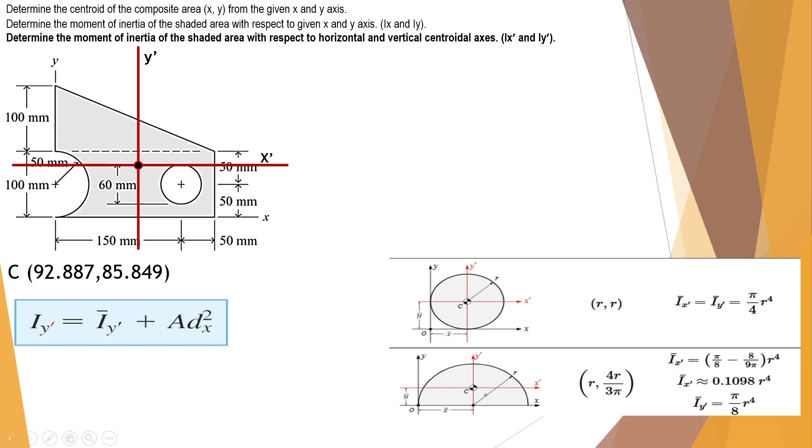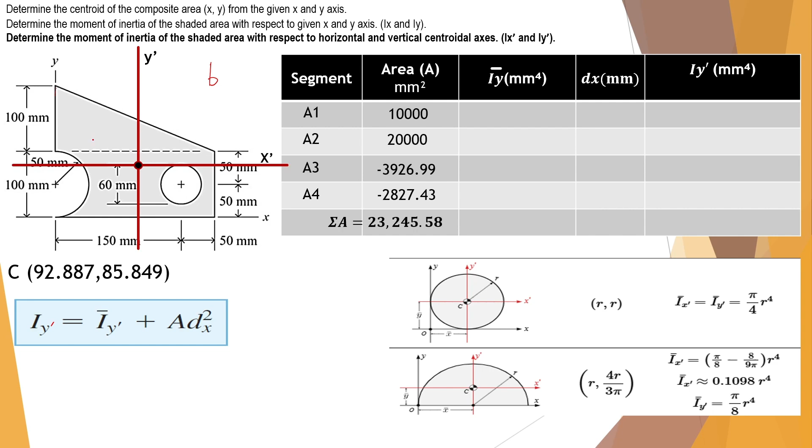So for the triangle, what will be the centroidal moment of inertia now? What is your base now? What is the height of the triangle? The base now is 100, since it's parallel to Y prime. And as I told you, the one perpendicular to the reference is the one that gets cubed. So this is your I, y, centroidal.

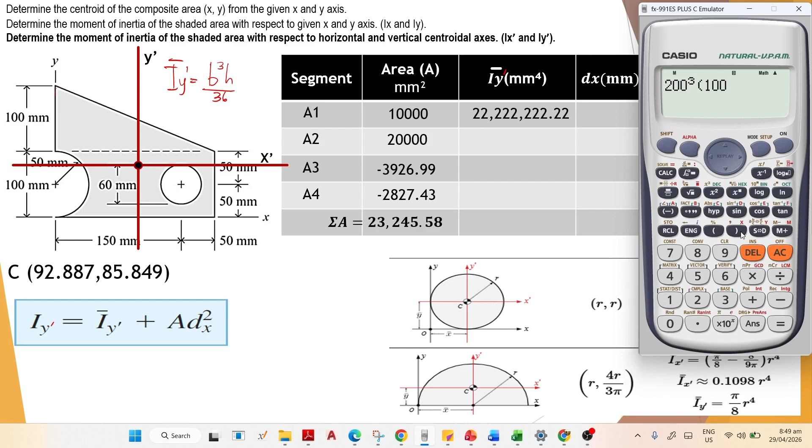Now for the semicircle orientation, let's set it up. The IY prime here becomes its IX prime, centroidal, because that's the one parallel to the axis of reference. So, 0.1098.

That's what happens in cases like this. 0.1098 times R of the semicircle to the fourth, which is 50, giving 686250. This is negative, to be deducted. And the circle is the same, pi r to the fourth over 4.

Now let's do the dx. This is measured from the reference Y prime, the centroidal axis, to the original centroid of each shape. So this is the original centroid of the triangle, and this is the dx we're talking about. To incorporate the centroid of 92.887, relate it to its original centroid measured from Y, which we got earlier — 1/3 of 200. That's what you're looking for, the 92.887, which is 1/3 of 200.

Relate them, it's deductible. 92.887 minus 200 over 3 gives us 26.22. And the centroid of area 2, the rectangle, is 100 from Y. Since 100 is bigger than 92.887, you just subtract.

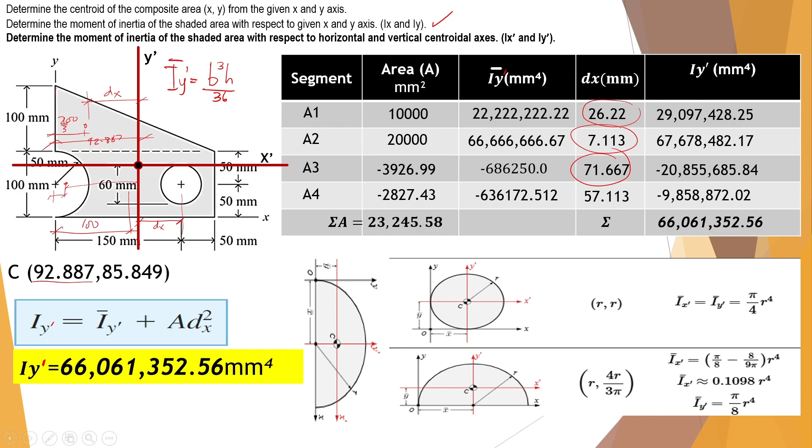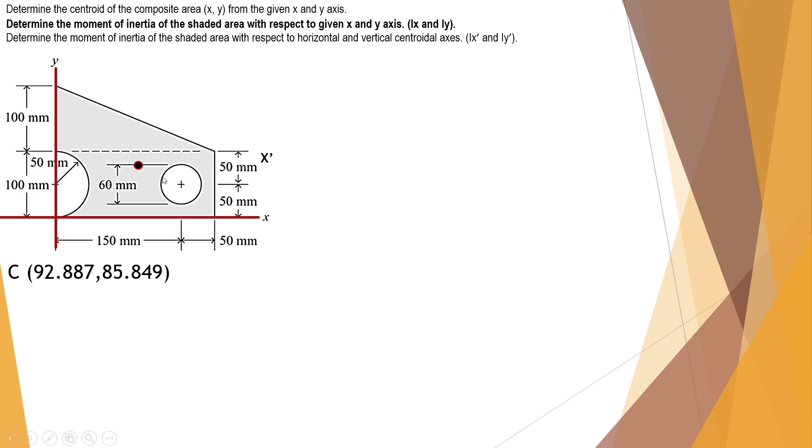When we get the summation or the moment of inertia at the given x and y, this is no longer the centroidal axis. Let's go with Y and X axis. What changes are just these — the moment arm locations of each shape. We'll get the moment of inertia with respect to that axis, so you'll use this formula.

Okay, IX, IX — these are the areas, this is your original moment of inertia. I won't explain that again. What changes now is just the dy. For the triangle, this is its centroid, and the measurement of dy is from the perpendicular axis, giving 133.33 — same as the centroids we got earlier.

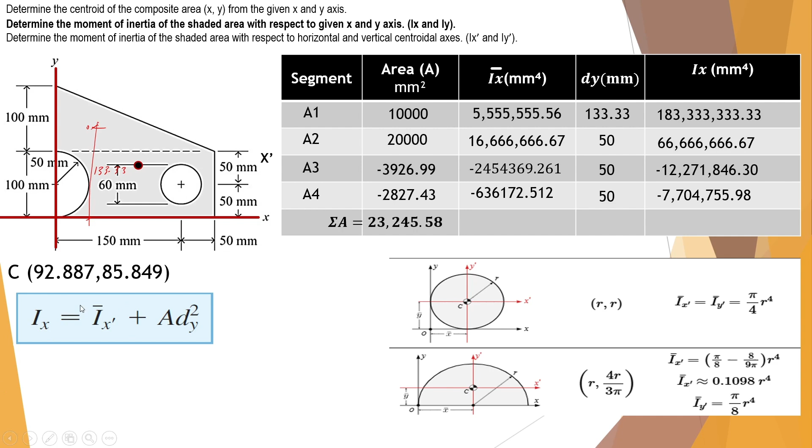Do the math, use this formula, and we have this answer.

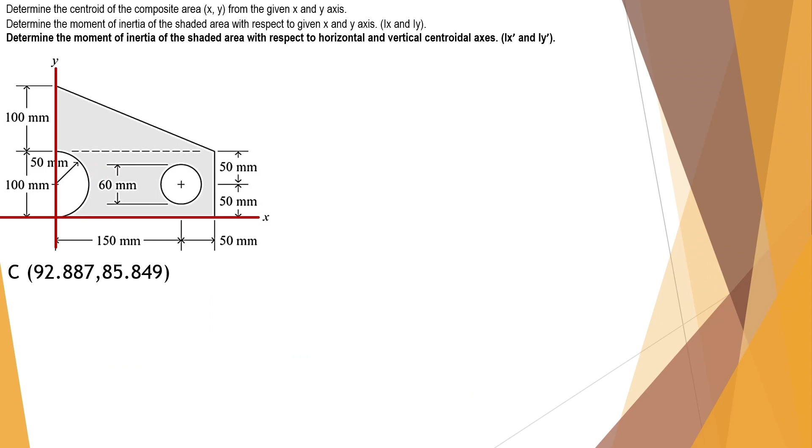And lastly, for Y, the centroidal moment of inertia stays the same — don't forget the orientation. Now we measure the dx from the Y-axis, the reference axis. This is your centroid, this is your dx1, 66.67, which is 200 over 3. This is your centroid for the rectangle, measure that — 100. This is your centroid for the semicircle, 4r over 3 pi, and this is your distance from Y, which is 150.